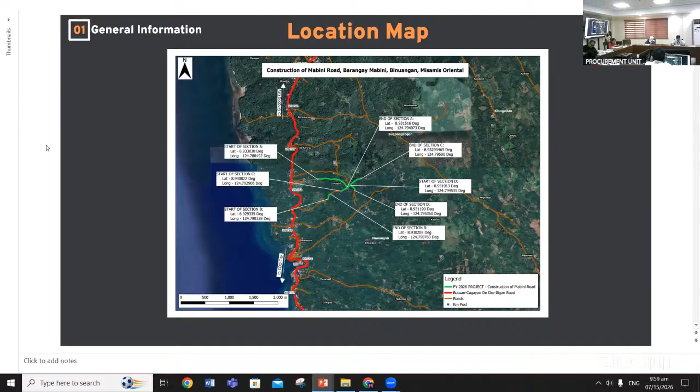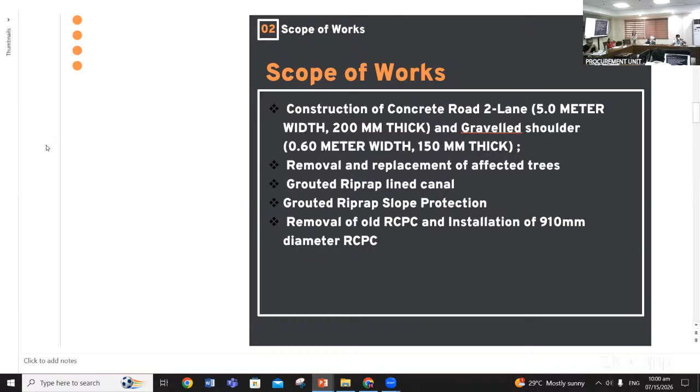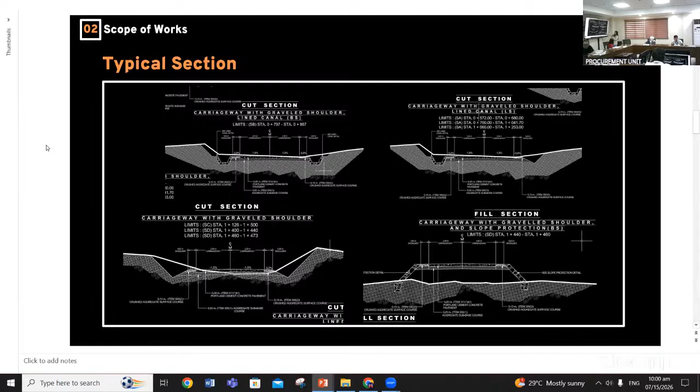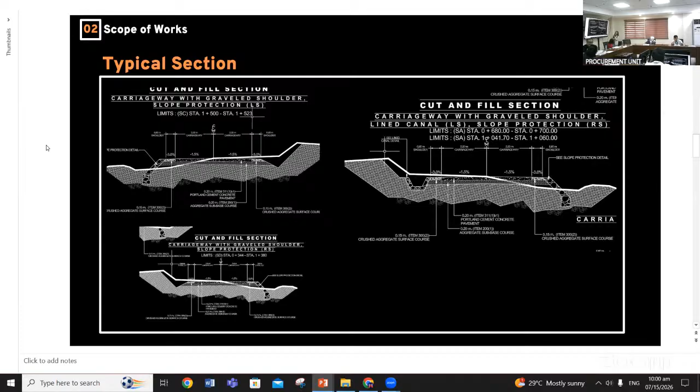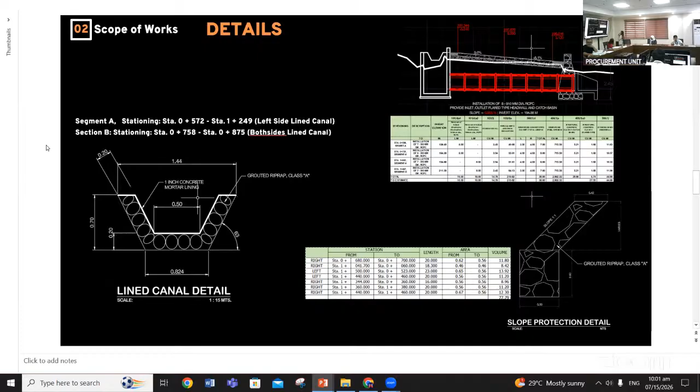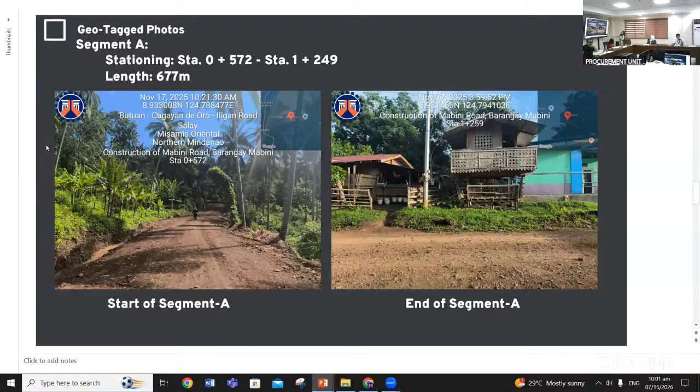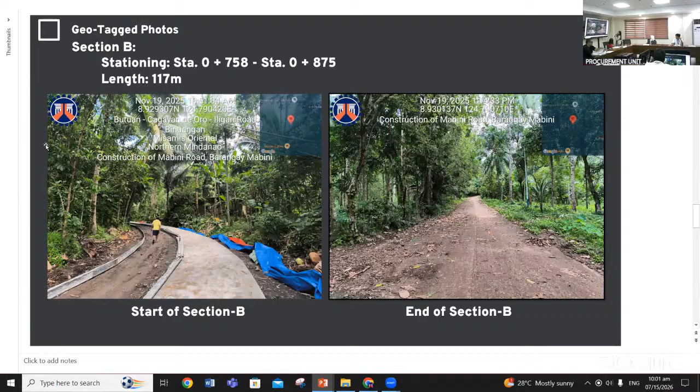section B. Next, please. So, section

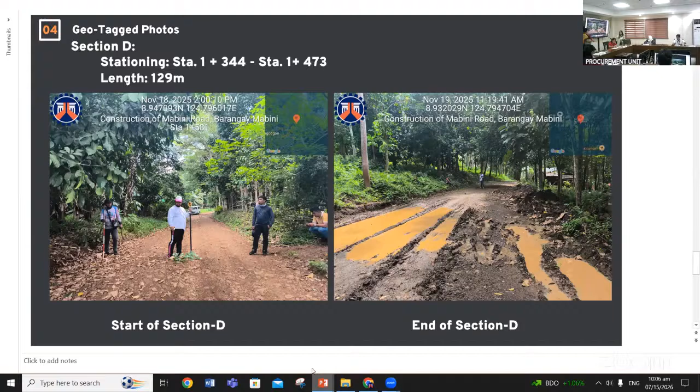Station 1340 plus 503 to station 1341 plus 283.

Next, please. The amount is 52,752,000 approved budget cost, 50,886,000. Total estimated cost 52,729,086.21. Project duration 254 calendar days.

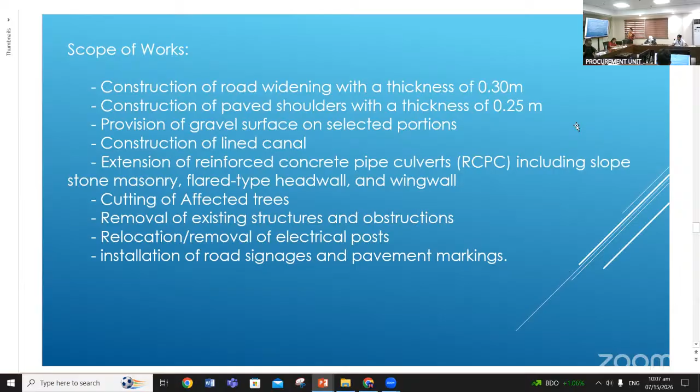Scope of works: construction of road widening with thickness of 0.30 meters, construction of paved shoulders with thickness of 0.25 meters, provision of gravel surface on selected portions, construction of lined canal, extension of reinforced concrete pipe culverts, including slope, stone masonry, flared-type, head wall, and existing structures and obstructions, relocation or removal of electrical posts, installation of road signage and pavement markings.

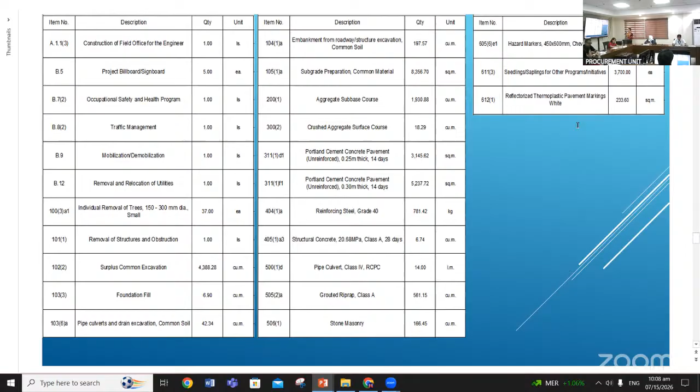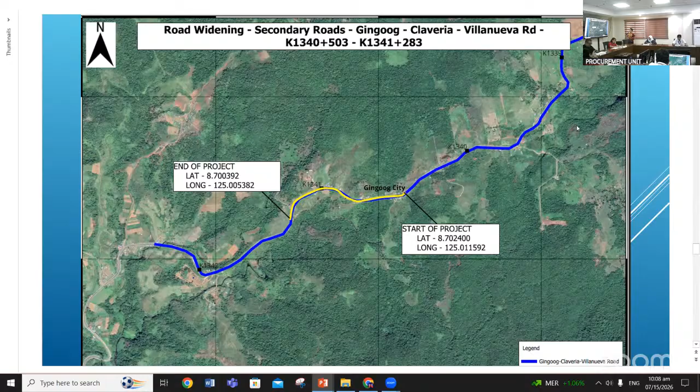Next please. So this covers the barangay. Next. Vicinity map.

As you can see, these are the existing lined canals, installation of lined canal. Then installation of culverts.

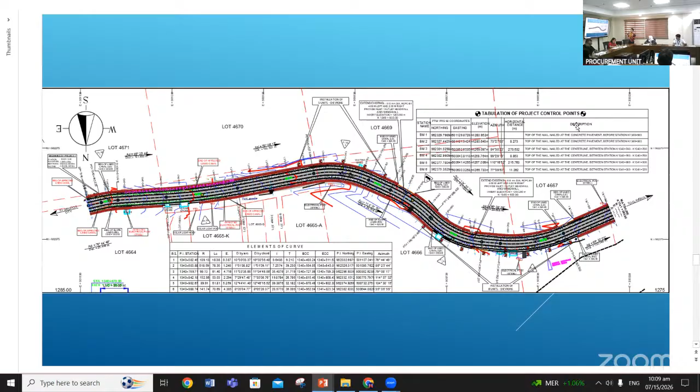Next please. So this is what we're working on for the project. Next. So typical roadway section, our portion has lined canal on both sides. Portion on the left side only has canal.

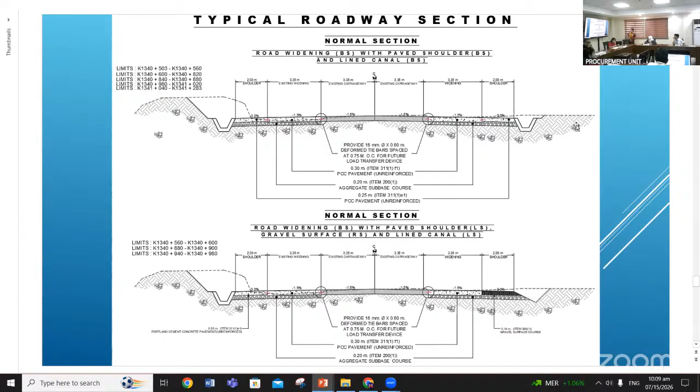Next please. Then left side has the canal.

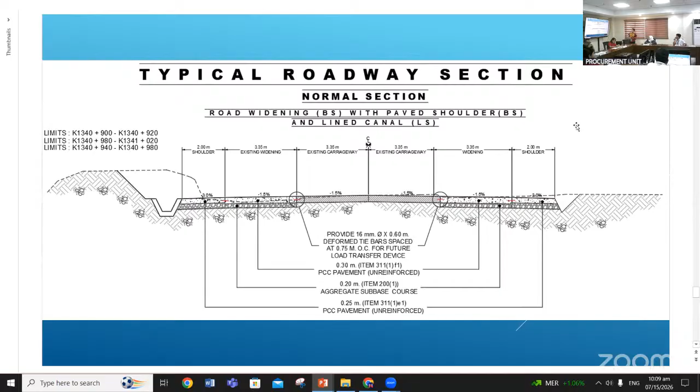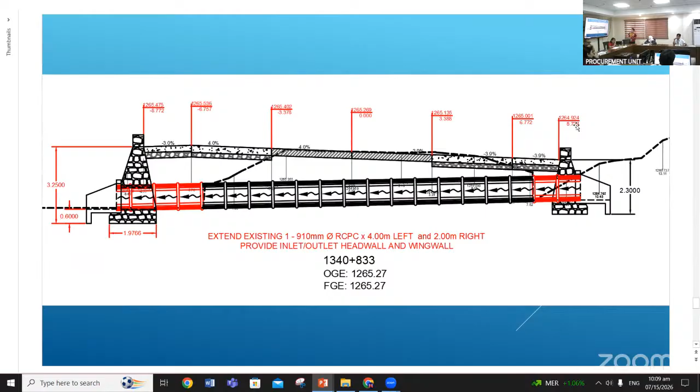So we have the installation and extension of RCPC, stone masonry. Next. Next. Back to start. And that would be all.

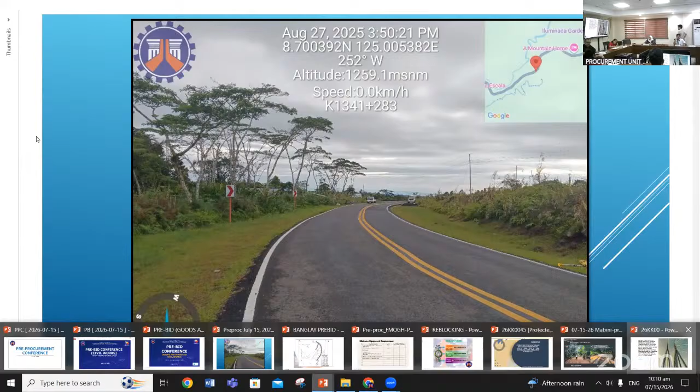The project with the title Installation or application of bridge safety facilities, bridge lighting along Butuan City, Cagayan de Oro City, Iligan City Road, particularly Talisay Bridge, Pangasihan Bridge, Odiongan Bridge, Anakan Bridge, Malubog Bridge, Kibaluyot Bridge, Gahub Bridge, Mangiskis Bridge, San Juan Bridge, Catuan Bridge, Lunao Bridge, Agay-ayan Bridge, and Minlagas Bridge.

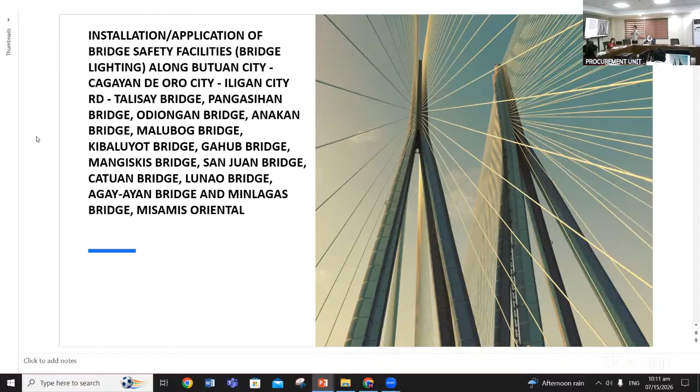So, Misamis Oriental. So, next please. So, contract ID, sorry, I have no input for that.

Number of bridges: 13 bridges for this project. Number of units: 68 complete sets of solar lights, location Gingoog City, Misamis Oriental. So therefore this project is under Gingoog City, Misamis Oriental.

So appropriation 10 million, approved budget cost 9,768,936.35 pesos. Project duration is 125 calendar days.

Next, please. So these are the locations of the bridges in different barangays along the National Highway. So we have Minlagas Bridge for Barangay Minlagas, Agay-ayan Bridge for Barangay Agay-ayan, Catuan Bridge for Barangay Lunao, and also Lunao Bridge, San Juan Bridge for Barangay San Juan, Mangiskis Bridge for Barangay 24A.

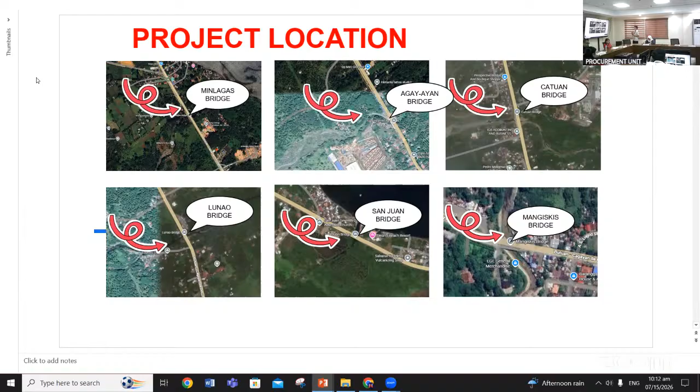Next, please. Gahub Bridge for Barangay 23, Kibaluyot Bridge for Barangay 22, Malubog Bridge for Barangay Santiago, Odiongan Bridge for Barangay Odiongan, Pangasihan Bridge for Barangay Pangasihan, and Talisay Bridge for Barangay Talisay. So the bridge names are incorporated into the barangay names.

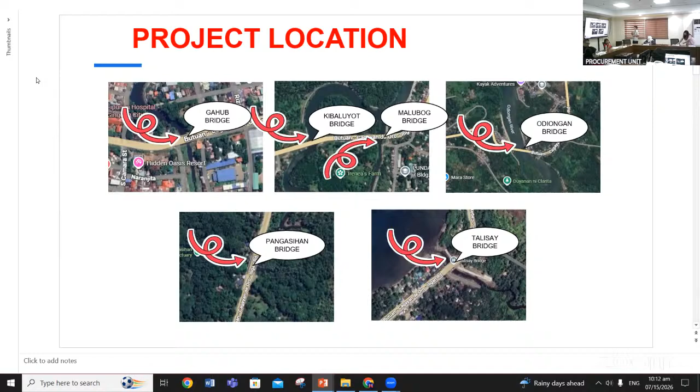Next please. So here's the project profile of the bridges with corresponding number of solar lights. So Talisay Bridge has 3 solar lights. Pangasihan Bridge has 3. Odiongan Bridge has 11 pieces. Anakan has 3. Malubog Bridge has 7.

Kibaluyot Bridge has 7. Gahub Bridge has 5. Mangiskis Bridge has 4. San Juan Bridge has 4. Catuan Bridge has 6. Lunao Bridge has 6. Agay-ayan Bridge has 5. Minlagas Bridge has 4. So, next please.

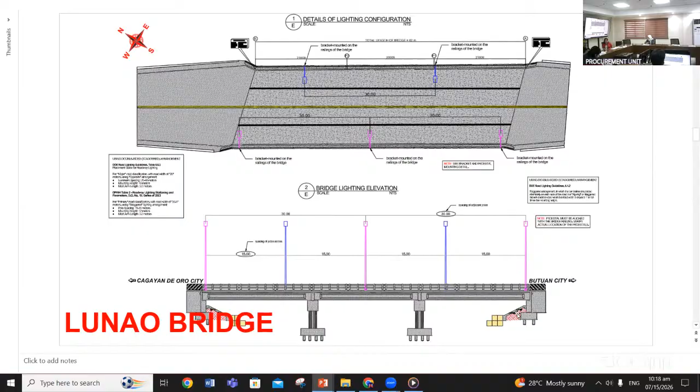First, a PhilGEPS certificate of registration. Second, a statement of all ongoing government and private contracts. Third, a statement of the bidder's single largest completed contract, or SLCC. Fourth, the bidder's computation of the net financial contracting capacity, or NFCC. Finally, for joint ventures, a joint venture agreement, or JVA, in accordance with Republic Act number 4566, otherwise known as the Contractor's License Law, and its implementing rules and regulations.

Please be reminded that the failure of the bidder to update their PhilGEPS certificate of registration with the current and updated supporting documents shall result in the automatic suspension of the bidder's certificate.

For the single largest completed contract, or SLCC, the bidder must have completed a contract similar to the project being bid. The value of the SLCC, adjusted for current prices of the PSA consumer price indices, must be at least 50% of the approved budget for the contract of the bid. However, contractors under small A and small B businesses who do not have similar experience may still be allowed to bid, provided that the cost of the contract does not exceed the allowable range of contract cost of their registration, in accordance with PCAB guidelines.

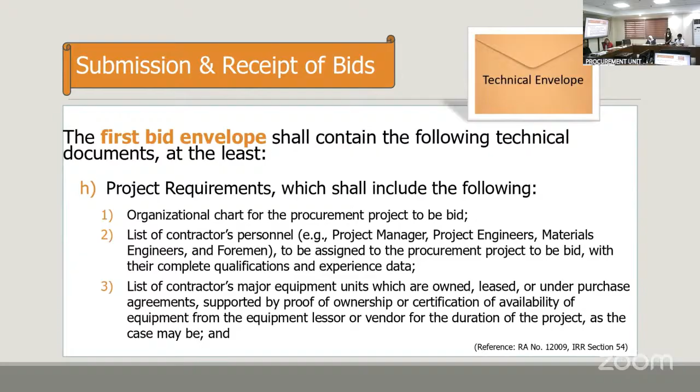3, the list of contractor's major equipment units, whether owned, leased, or under purchase agreements, supported by proof of ownership or certification of availability from the equipment lessor or vendor for the duration of the project. 4, omnibus sworn statement in accordance with section 54.3 of this IRR. 5, latest General Information Sheet, or GIS, reflecting the beneficial ownership information, BOI, duly received by the Securities and Exchange Commission, SEC, for corporations. The following forms are for your reference.

For bid security, all bids under competitive procurement methods must be accompanied by bid security. The bid security serves to guarantee that the bidder will enter into a contract if awarded the project. The bidder shall submit either a bid security declaration or any form of bid security in an amount not less than the required percentage of the ABC, according to the following schedule.

Cash, or cashier's or manager's check issued by a bank: 2% of the ABC. Bank draft or guarantee, or irrevocable letter of credit issued by a bank: 5% of the ABC. Surety bond callable upon demand, issued by a surety or insurance company: 5% of the ABC. The omnibus sworn statement must be executed by the bidder or by its duly authorized representative.

It should contain the requirements outlined in section 54.3 of the Implementing Rules and Regulations of RA 12009, regarding contractors' key personnel. The key personnel should have the following number of years' work experience. The experience means total years of civil works experience of any nature in construction and engineering consultancy service. Include the tax identification number, or TIN, of the key personnel.

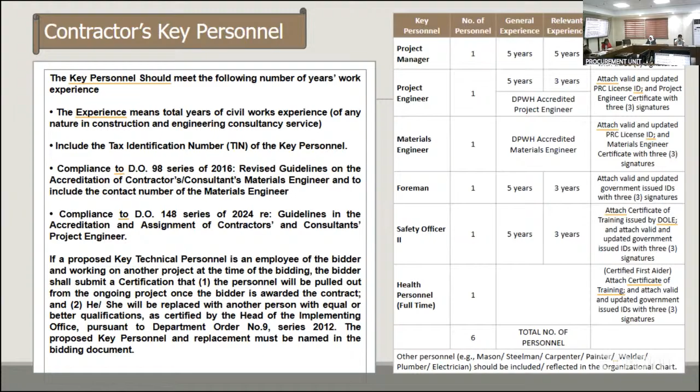For contractors' major equipment units, the contractor must provide proofs of ownership or other supporting documents for equipment that is owned, leased, or under purchase agreements. For leased or purchased equipment, a certificate of availability from the lessor or vendor must be submitted for the duration of the project. Proofs of ownership and supporting documents must specify model and year, capacity, performance or size, plate number, motor number, body number, chassis serial number, engine serial number, and specific location and condition of the equipment. These requirements are in accordance with Department Order 58, Series of 2012.

For contractors' minimum materials testing equipment, refer to Department Order 11, Series of 2017 for the required equipment.

The second bid envelope shall contain the following financial documents: original of duly signed and accomplished financial bid form; original of duly signed bid prices in the bill of quantities; duly accomplished detailed estimates form, including a summary sheet indicating unit prices of construction materials, labor rates, and equipment rentals used in coming up with the bid; and cash flow by quarter.

Submission and receipt of bids. Bid submission may be done manually or electronically online. However, bidders should only select one mode of submission, either manual or electronic. The address for receipt of bids submitted manually is BAC Conference Room, 3rd floor, DPWH MOFDEO, Barangay 26, Gingoog City, Misamis Oriental. For electronic submission, electronic bids at Misamis Oriental 1 at dpwh.gov.ph.

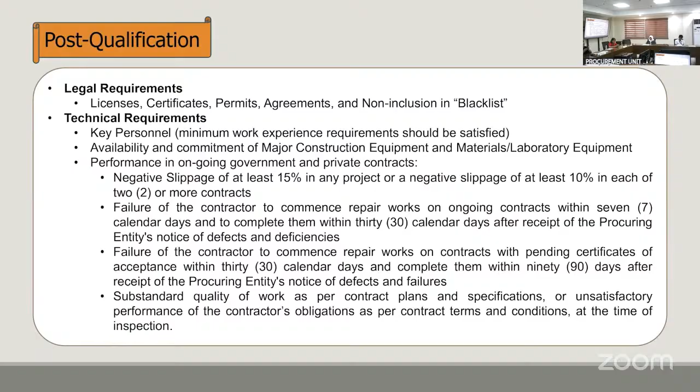Financial requirements: bid price proposal, required committed line of credit in the amount specified and over the period stipulated in the bidding documents when applicable, and NFCC, within 5 calendar days from receipt by the bidder of the notice from the BAC.

That the bidder has the LCB, MIAB, MAB, or HRB, the bidder shall submit all the eligibility documents supporting its PhilGEPS certificate of registration, platinum membership, its latest income and business tax returns filed for the preceding quarter, which should not be earlier than 2 quarters from the date of submission and receipt of bid, and other appropriate licenses and permits required by law and stated in the bidding documents.

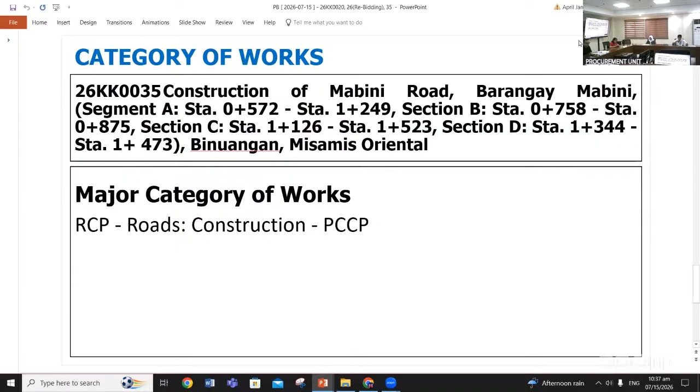Major category works, roads, construction, PCCP.

For technical and financial documents, please refer to the sample on the screen. It is a mandatory requirement that the bid and supporting documents should be hard-bound and properly done. Thank you.

Activity 64F, continuing appropriation.